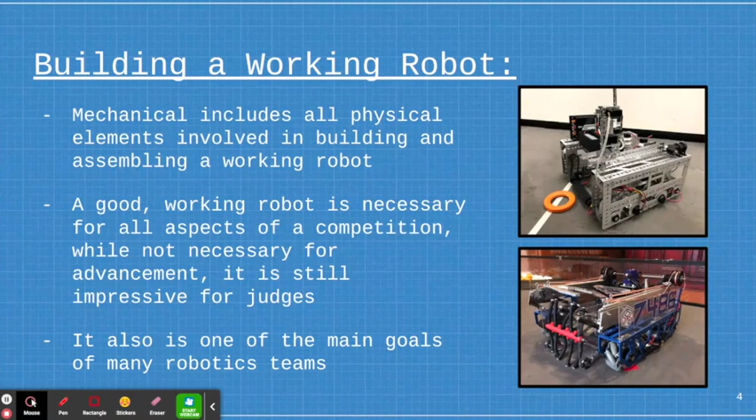So another important thing that mechanical leads to is winning competitions. As you guys probably know, competitions aren't solely about having a good robot, but in order to win the top awards, a good robot is often needed. And additionally, having a strong robot allows your team to increase your chances of advancement by allowing your team to perform better in matches. Well, there's a lot of variables that go into match play, such as your teammates and if anything breaks or Wi-Fi issues, etc. Having a good robot just increases your chances for things to go well. And even if stuff goes wrong and you're not an alliance captain, having a good robot will still increase your chances of being picked for a final alliance team.

And one of the most important parts, at least for our team, is sponsorships. While many sponsors might not know specific details about robots and FIRST, they do know what to look for. And so having a good robot, even if it just means it's able to move around quickly and it's able to pick up blocks or whatever and do a fun demonstration, many sponsors find that to be super engaging, and they like seeing that you're making physical progress and are actually building a robot.

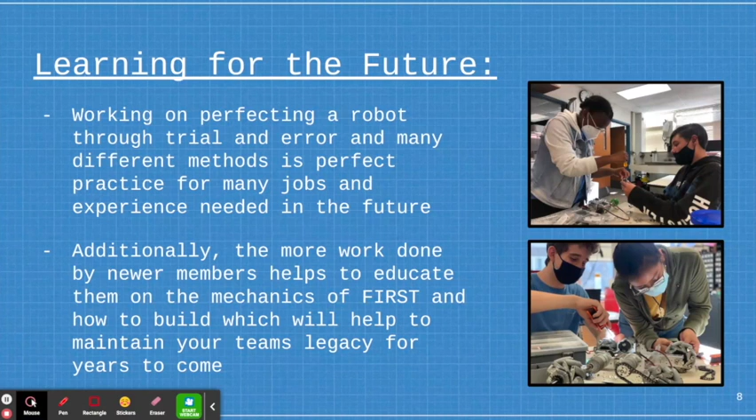So it's super good. And additionally, it also helps to keep your team sustained. Mechanical, as I've mentioned, is one of the most important parts of a team. And so having new members and just everyone really work on mechanical, you're helping to ensure that your team is able to be sustained for years to come. And so it's really important.

And now I'm just going to talk about the mechanical process because it can seem a little overwhelming. I mean, it's pretty much everything to do with building, so it's a lot, but I'm going to try to break it down. So our team uses the engineering design process when just building our robot. So it's used mainly when just trying to solve any problem.

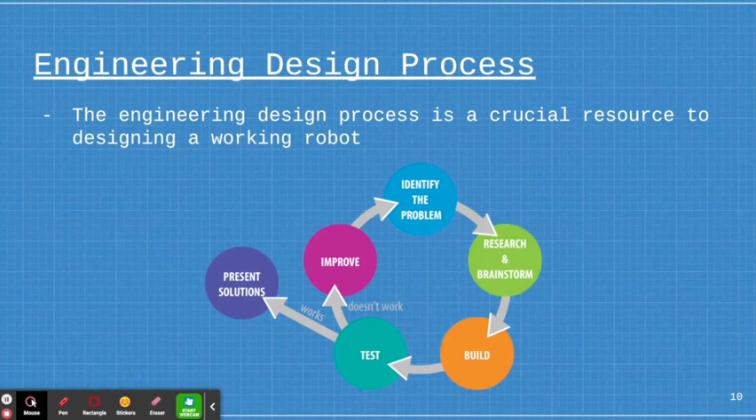As you guys can see, it's like a circle, and I'll kind of get into that a bit more later, but it just pretty much provides the steps of how to go through and solve a problem. And so I'm just going to break down how we do that. So first step is brainstorming, and I'm sure a lot of you guys do this already. So the first part is to just brainstorm different possible solutions.

So our team likes to do this by getting around a whiteboard and just sketching out different ideas we might have. And one of the other things we also do during this kind of phase in our design process is to discuss different priorities for our season. So, for example, this year we talked about whether or not we wanted to go over the barrier or around the barrier. In prior seasons, we talked about what type of wheels we wanted to use.

So, this is just really kind of setting up the building blocks for your season and ensuring that you have a good foundation and good kind of basis for all your ideas. And brainstorming is one of those things that kind of happens as you go, but having a good solid brainstorming session with your entire team at the beginning of the season allows everyone to be on the same page for your general kind of ideas going forward.

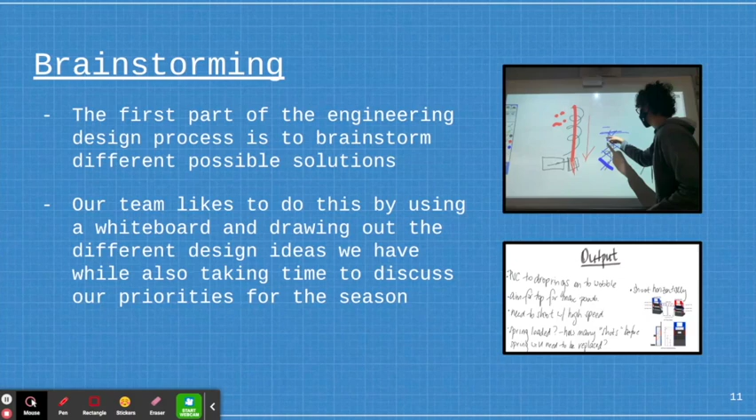Next is prototyping. So after brainstorming, we like to make prototypes of some of our ideas. And prototypes are just kind of quickly built versions of our designs so we could test ideas without having to spend a lot of time or use a lot of materials to actually test these ideas. This allows us to just, again, test ideas to make sure they work the way we want to before we spend months and lots of time and materials on an idea and then have it actually not work.

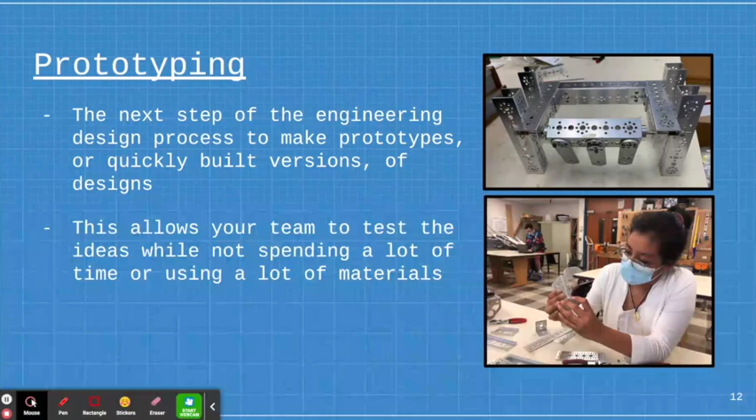Again, prototyping is one of those things we kind of do a lot throughout the season. So as our ideas fluctuate, we'll often build a quick prototype to test new versions and make sure it works the way we want it to. After prototyping and kind of coming up with our favorite concepts, we like to use a 3D modeling program in order to design our robot beforehand.

We use Fusion 360, but there's also many other programs out there. Like I know teams who use SolidWorks. I know some teams who use Blender. So it's really just about finding what software works best for you. We like Fusion because it is cloud-based, and we're also able to get free accounts just because we're students. But again, it's just about finding what software works best for you.

So, using a 3D modeling program, this ensures that our entire robot will basically be able to do what we want it to do, and we won't have to struggle to fit stuff in later or have stuff that doesn't fit, and it allows us basically to ensure that everything we want will be on the robot. And it also is really nice because it's kind of like instructions for when building your robot. It's like using a Lego guide because you're just copying what you see, what has already been made.

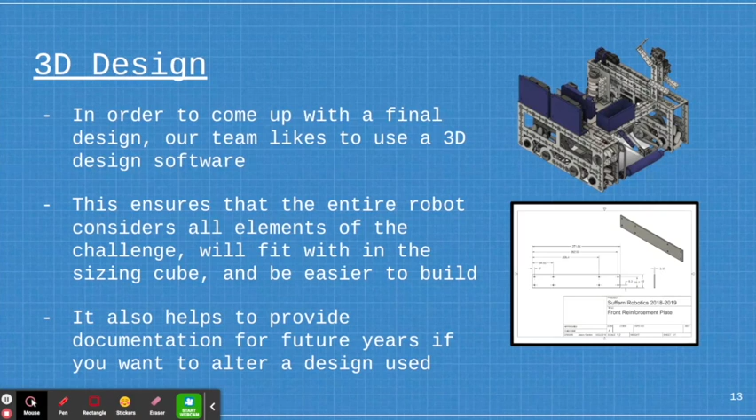And it's also good because it helps to provide documentation for future years. So there's been many times where there's a design that we've used in the past few years, and we're able to just go back and look at it and be able to alter it to fit our design. It helps you to avoid reinventing the wheel. And again, it's just something that's good for maintaining your team's legacy.

So after fully designing our robot in CAD, we begin to fabricate, or basically build, the parts we need for our robot. This is pretty much done if your team decides to use custom parts for your robot. We like to use custom parts because it allows us to do stuff that might not be available otherwise. I'll talk about that in a bit more detail, but we make these pieces typically out of metal, and we use just common hand tools such as a bandsaw or a drill press in order to get the desired shapes and sizes.

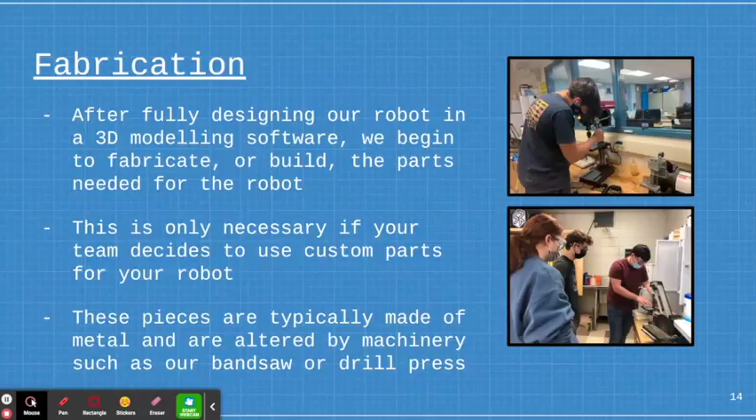After the completion of our individual components through fabrication and just purchasing parts, we begin combining everything together into different subassemblies and then larger subassemblies. Working in smaller subassemblies has been super helpful for our team because it allows us to have different people working concurrently, and then we could just combine everything at the end. So this allows us to maximize our time.

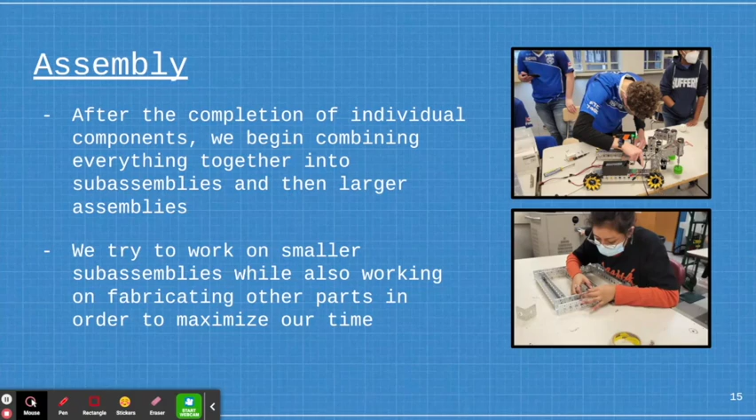And it's also helpful because if, let's just say, one part of your robot doesn't work or part of it breaks, you don't have to disassemble the entire thing. You could just take off that one part that doesn't work. And then we also do assembly at kind of the same time. So we'll have someone working on the chassis, and then once someone finishes, let's just say the intake, they'll put it on the chassis while someone is still working on the output. So this helps us be super efficient and again is really useful.

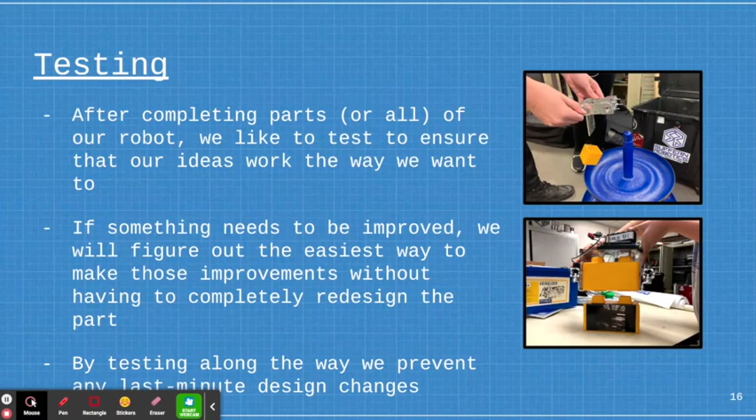So after completing different parts of our robot or the entire robot, we like to test things along the way just to make sure everything works the way we want it to. Testing along the way allows us right then and there to know if our idea needs to be improved. This way, as I mentioned earlier, you're not sitting there with a completed robot that doesn't work and you have to go back and redesign everything. And also, testing along the way allows us to look at these parts and see, is there anything we could change quickly to make it work, or do we have to fix this entire idea? So this is just a way to be efficient and ensure that later down the line, things work the way you want them to.

And then, as I mentioned earlier, we just kind of repeat the process. A large portion of the design process is just repetition in order to get the best possible results. So even if the robot is finished, there are often things that could still be optimized. And even if there isn't something obvious that you could do to make your robot better, there's still stuff you could do, such as autonomous and driver practice. So there's no real end for robotics, and I'm sure some of you already know that, but that's just something to keep in mind.

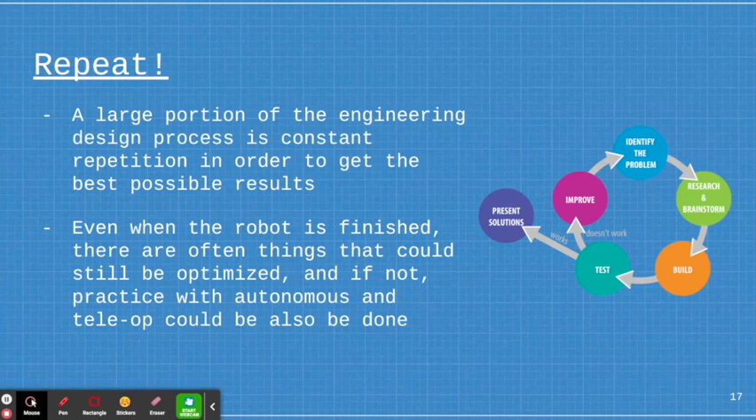And now, as I mentioned earlier, there are a lot of different methods to building and fabrication, and it could be a little overwhelming, so I'm going to try to break them down. While not necessarily building, 3D printing is super important, and a lot of teams utilize it. Sometimes it could be easier to design a specific part in CAD that could be 3D printed to accomplish a specific task that a part might not be sold for. For example, our team needed these super specific brackets that weren't really available in any size. So instead of trying to make brackets ourselves out of metal, we just made them with our 3D printer. This allows us to accomplish a task that we wouldn't have been able to solve otherwise.

And if you're designing your robot in CAD, or at least parts of it in CAD, it's a lot easier to make 3D printed parts because you can design them directly on your CAD assemblies. And I know 3D printers are kind of expensive. So if your team doesn't have one, there are many companies that are able to 3D print, and you can even talk to some local companies and see if they'd be willing to sponsor you or give you a discount because you're a robotics team. A lot of times companies are willing to do that if they know that their products are going to go on the robot.

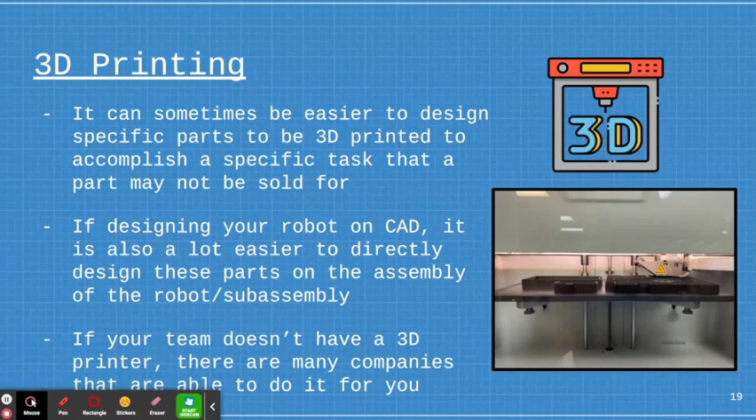Next, as I mentioned earlier, fabrication. So this is a way just to build custom parts for your robot with tools and other materials that are often readily available. Our team uses metal and just other hand tools such as a bandsaw. We use a sander and stuff like that.

So, like with 3D printing, this allows your team to have access to parts that are probably not sold on the market, or if they are, this just allows your team to have customization of them to complete a specific purpose. So we've made certain panels that wouldn't otherwise be available. And so even if you are using a build kit, which I will get into later, fabrication is crucial to ensuring that your robot is able to complete the tasks you want it to.

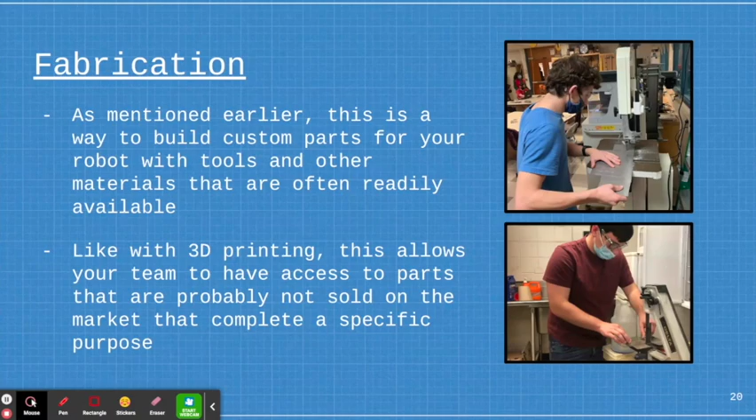Next is CNCing or machining. So, like the other options mentioned before, using a CNC allows your team to create custom parts otherwise not available. For those of you who may not know, a CNC is what I like to call a reverse 3D printer. A 3D printer works by building up plastic layer by layer to get the end design. A CNC works the opposite. You start with a piece of metal and then cut away in order to get your final result. CNCs can be very expensive and require a lot of training in order to use them.

So if your team wants to use custom metal parts, as you can see in the image there, or like in the past, our team has made custom chassis, you could use a CNC and try to save up for one, or there are often many companies that will offer CNC or laser machining as a service. And again, similar to 3D printing, if you mention that you're a robotics team and say, hey, this would be for our robot, they'll oftentimes maybe give you a sponsorship or a discount.

So CNCing is definitely something that is super awesome if you're able to do it, but also if you can't, don't worry about it. I just wanted to cover it just in case people were curious.

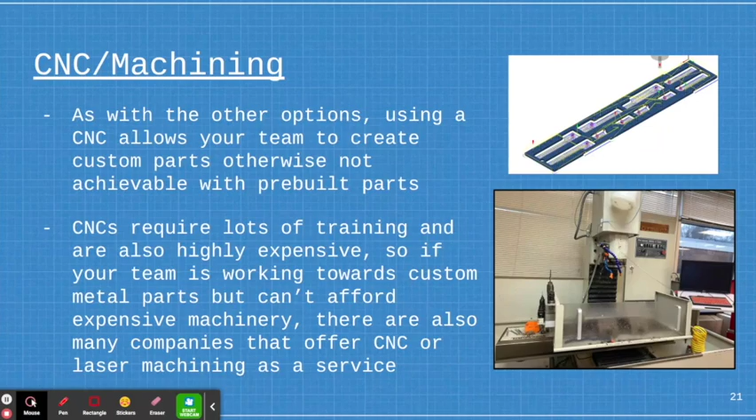So now pre-built kits. Most teams are probably familiar with these. These are kits which come with pre-made channels and other parts with holes that all fit together that allow you to arrange them however you want in order to create a basic frame, chassis, etc. It's kind of similar to Lego, if that makes sense.

These kits are extremely useful for both rookie and veteran teams. For rookie teams, when you don't have a lot of material starting out, this provides a solid foundation and allows you to use limited resources to build a great robot. And for veteran teams, it's just useful to have these parts lying around to attach to stuff you might already be making.

So there are many different build kits out there, and it's important to figure out which one would work best for your team. Tetrix, which is considered one of the oldest build kits around, primarily uses metric, but it could also be used with some imperial parts if sized correctly and using proper conversions. It also doesn't contain a lot of holes, which can be constricting when building. If you want to alter your design later, you might not have the hole available to do what you would like, so you're either going to have to drill it or figure out placement. So that's definitely a negative thing.

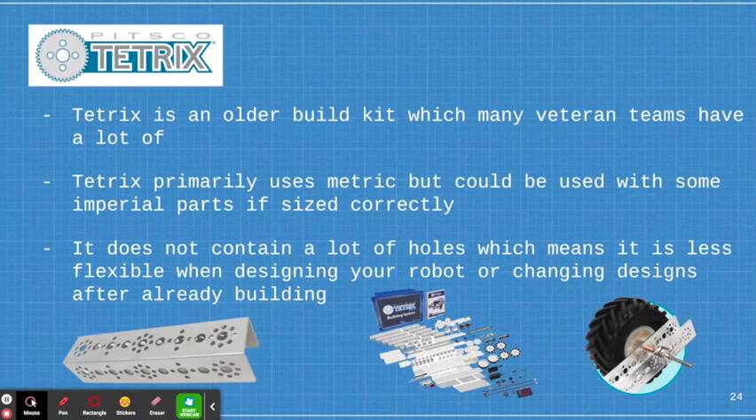Next is Actobotics, which is a kit made by ServoCity, and this is designed primarily for FTC. Actobotics is imperial, and it is pretty difficult to use any metric parts with it at all, which is annoying because our team primarily uses metric, but it's up to you. As you guys can see, it has a lot more holes than Tetrix, so that makes it more useful right off the bat. And it also has been around for a bit longer than other newer build systems, but it's a bit newer than Tetrix.

So, like Tetrix, we also just have a lot of Actobotics lying around. So for veteran teams, again, if you have it, I would recommend using it, especially if you can't afford a newer build system.

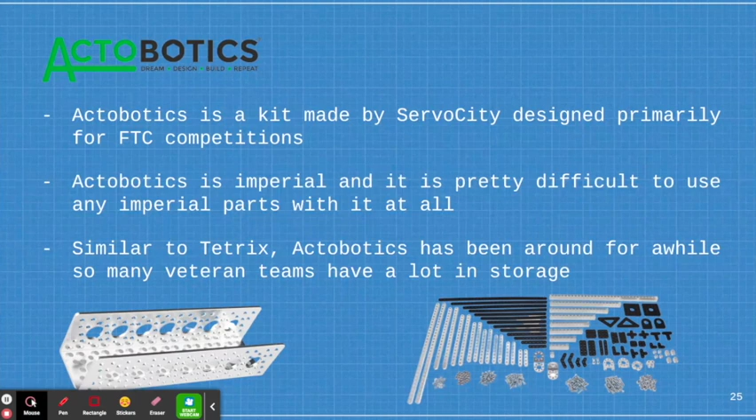Next is goBILDA, which is personally my recommendation, but I'll get a bit more into that later. So goBILDA is a newer build system. I think it came out a few years ago, which is also made by ServoCity, similar to Actobotics, which is ServoCity. And it's designed entirely for FTC. The system uses metric, and there are some conversions available to Imperial.

Since it's newer, it offers a much sleeker design, and it has, again, many holes, and it has just really good features, especially for FTC teams, where you can place motors inside the channels. That's my personal favorite, to help save space. And it's just overall a much sleeker design. However, like I said, it is newer, so for veteran teams who might have other parts, it's not necessarily worth it to buy this. But if you are a newer team, I would recommend it.

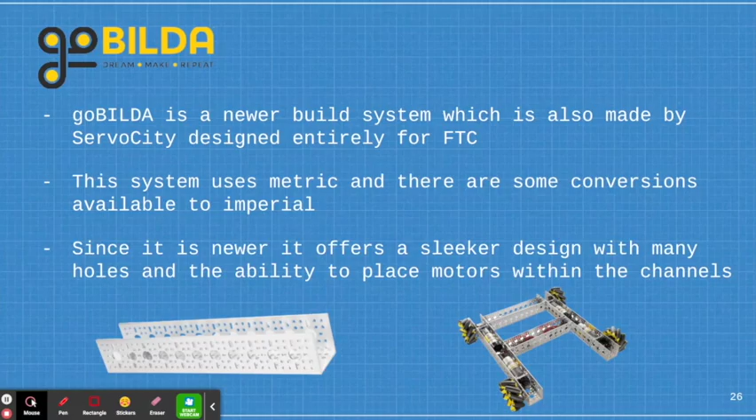Now, which is best for you? There's no correct answer. It really depends on the team. For veteran teams who may have a lot of Actobotics and Tetrix lying around, switching to a build system can be expensive, and it's also difficult because you might need to purchase new tools and new screws, and there's just a lot that goes into switching to a new build system that you might not realize. Our team recently switched to goBILDA, and along the way there's a lot of stuff that you don't consider, like pieces that you might forget to order, and now you're having to wait a week to get in a new piece that you needed that you forgot to order.

So for veteran teams, if you have a lot of Tetrix or you have a lot of Actobotics and you're familiar with it and you're able to make it work, I would recommend maybe just sticking with it, unless there's something really specific you want from a newer system, in which case then you could switch. But for teams, Tetrix is able to do the job, Actobotics is able to do the job, so it's really up to you. However, for newer teams, I would recommend going straight to goBILDA.

It is a little expensive, however, I think it's worth it. It's super sleek, and it's just able to accomplish a lot of things that Tetrix and Actobotics can't. And so if you're looking for a new build system to buy right off the bat, goBILDA is great. And they also provide discounts for FTC teams. So I would recommend that.

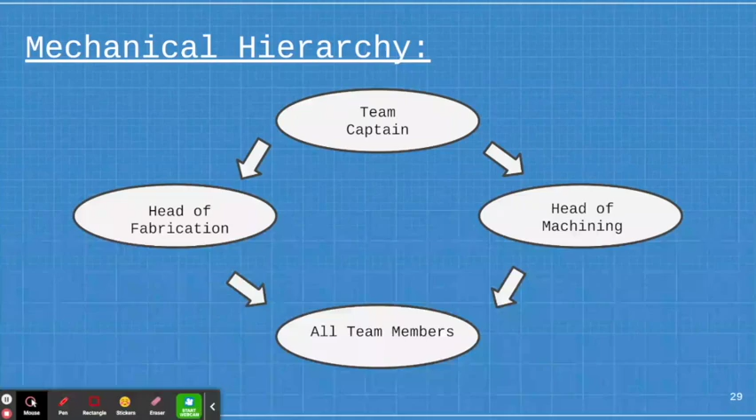This allows us to know what we need to work on in future meetings, and it's also super useful when it comes to documentation. And now, team management software. Our team in the past has used team management software, but because we are a school team, we're no longer allowed to use it. But it could be extremely helpful. So there are many free options available, such as Asana, Trello, Monday.com, etc.

These are all very useful because it allows the team to keep track of what needs to be done, what has been done, and it allows you to sort into different categories. So you could have sections on mechanical, you could have sections for CAD, and it's really useful and allows you to see visually what needs to be done.

So I'm just going to go over some mechanical tricks we've learned throughout the years. Mechanical can seem like a very overwhelming concept, and it is because it encompasses a lot, but there are many different tricks and tips that we've learned throughout the years that make the process a bit easier. So at the start of our season, we've done workshops, which allow us to ensure that newer members are starting with a baseline level of knowledge. So at the beginning of our season, we spend about a week doing workshops in the 4 main areas of robotics: documentation, CAD, programming, and of course, fabrication.

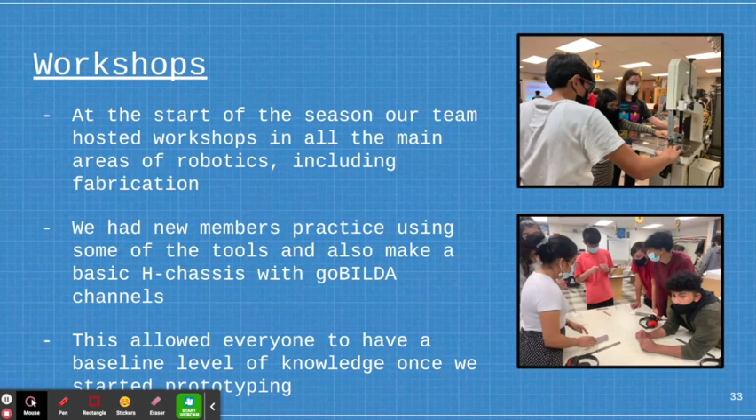So we have all of our new members practice with using basic tools, so cutting different parts out of metal, using the bandsaw, or drilling holes using the drill press. And then we also have them make basic H chassis using goBILDA channels. So this allows them to have practice with some of the things we're doing most with mechanical, which is just making parts and building chassis. So once we start prototyping, this is extremely helpful because it allows everyone to have a baseline level of knowledge in the workshop and allows them to feel more confident when it comes to building.

During our workshop for fabrication, we also spend time going over workplace safety. So this is extremely important for any mechanical organization as well as a robotics team. It just makes sure that everyone knows how to be safe and ensures that there's no accidents later down the line. So we went over basic safety information, such as how to properly operate tools, where to find different safety equipment, such as our safety goggles and first aid kits, and just how to be safe in the workshop. So going over this right off the bat allows us to ensure we're safe throughout the year and that there's no major accidents.

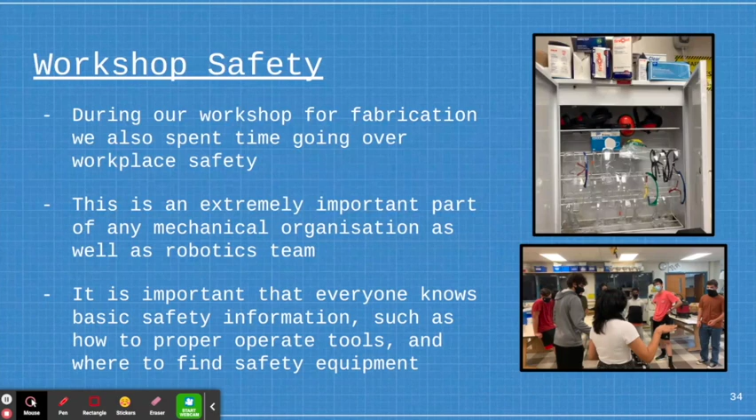Another thing we do to help keep our mechanical going strong is we like to do certain cleaning and organization days. So in order to keep our workshop organized and reduce the time we have to spend looking for tools and different parts, we'll regularly have days where we spend time cleaning and organizing the workshop. So we won't have days where everyone just stops what they're doing and organizes. We'll have certain members take a break from whatever they're working on and spend some time, not even an entire day, but just making sure that everything is in the right spot, help organize any loose materials, and ensure that everything is easy to find.

Again, this just helps improve efficiency because there's been times where we lose a drill bit or we lose a part, and then we have to have everyone on the team like, okay, everyone please spend 5 minutes looking for this. When instead of doing that, just along the way, you could take small breaks and have team members organize stuff as you go along.

Now, as I mentioned a few times, mechanical is one of the largest and most important parts of any robotics team, so it's really important that everyone gets involved, even if they're not builders. So I'm just going to go over how we do that. So, again, at the beginning of the year, we did workshops. This ensures that everyone has a basic understanding of mechanical concepts. And what we'll also do sometimes is before competitions, we'll say, hey, everyone take a break from what you're doing, and we're going to go build this part, we're going to do an assembly line.

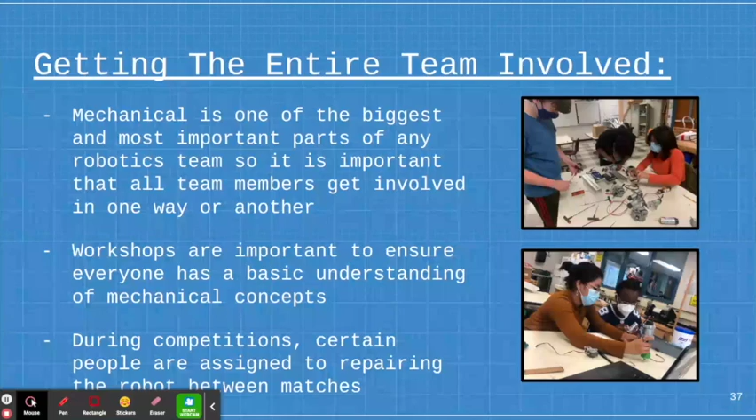Next, preparing for failure. So unfortunately, even the best built robots can have failures and parts break, and so it's important to prepare for that. So, as mentioned before, there's many things that can go wrong, and here are just some of the most common things that go wrong in my experience as a veteran team. So parts breaking, more specifically 3D printed parts.

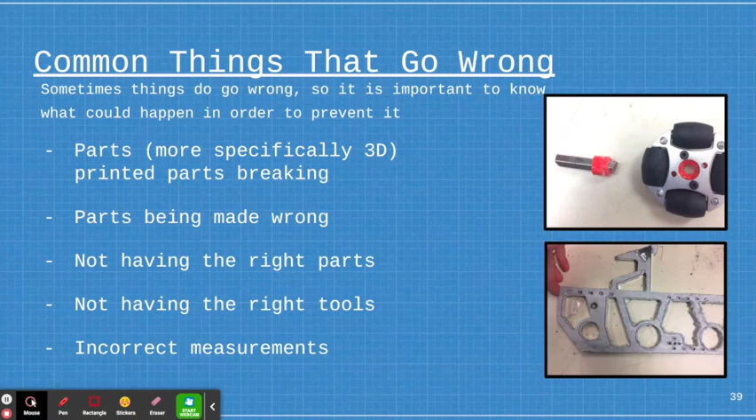And then not having the right parts and not having the right tools, that's not necessarily something that goes wrong on your end, but it definitely is something that halts progress. And then incorrect measurements, measuring stuff wrong and not finding out you don't fit in the sizing cube, or your part that you designed doesn't fit where you want it to go. So there's a lot of things that can go wrong. And so just how to prepare for that.

One of the biggest tips I can give you, if you haven't already been doing this, 3D print extra backup parts. If you're using 3D printed parts, print more. You never know what part is going to break, and if you're at a competition or you're running matches or you're at an outreach event and that 3D printed part that's controlling your entire output system snaps, you want to be able to replace it. Even if it means you were down for one match because your arm isn't working, you want to be able to get back in, and having the backup parts allows you to do that.

And also, if possible, try to make backup parts for high-risk metal parts as well. So, for example, in prior years, we had metal parts that our entire robot was hanging off of, and we made backups of that just in case. We were fortunate that nothing ever happened to it, but we know teams who've had metal parts break. So it's just always important to bring backup parts. And again, similar to that, always bring tools when you're traveling. I'll talk a little bit more about what we bring later on, but bringing tools allows you to ensure that if anything goes wrong, you're able to fix it.

And now, in order to ensure that things are made correctly, double check your measurements before beginning to build parts. There's the famous expression, measure twice, cut once. So this just saves time later down the line. And if you have decided to CAD out your robot, that is super helpful for ensuring that everything will fit. So you just have to make sure to check those measurements in CAD. And then again, just take your time when building it, taking an extra minute or two to make sure your part is lined up properly and that all your holes are aligned. It will save time later down the line because you won't have to remake those parts.

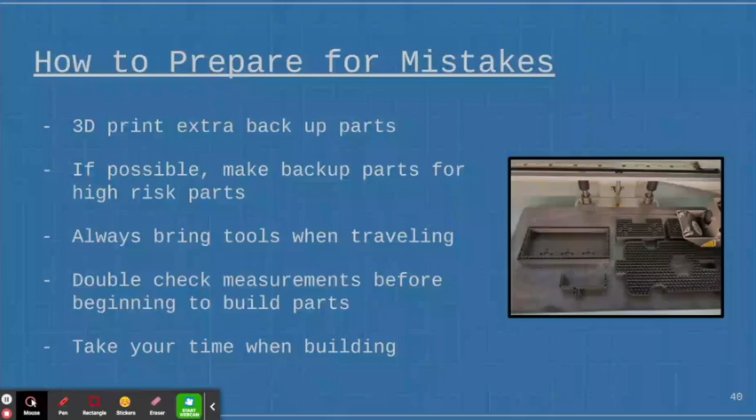Now, winning awards and competitions. Mechanical is a crucial part of competitions, as I mentioned earlier, and I'm just going to go into how it can kind of lead to winning competitions and awards. So for winning competitions, you kind of need a good robot. One of the most important parts to having a successful robot is consistency, I've noticed. So consistently scoring low points is often more valuable compared to inconsistent teams who go between scoring high and low amounts of points.

So even if your robot isn't able to do some of the high scoring tasks, as long as it is able to consistently score a good amount of points, you're often able to make it as either a final alliance captain or even just be picked on a final alliance team.

In prior years, what our team has done is focus solely on ensuring our input was good before even making an output system. This way we could have a strong foundation. And while just having an input system isn't super helpful in scoring a lot of points, in earlier competitions in the season, it was actually really useful just having an input system that worked really well because we were able to consistently score a decent amount of points, and that actually allowed us to be a final alliance captain. So it's really just about consistency.

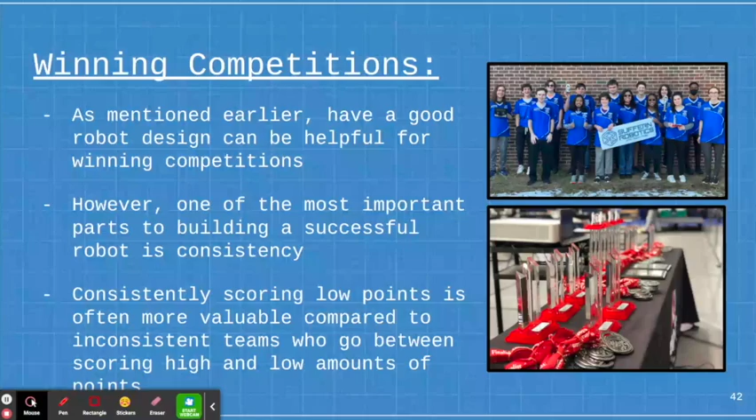Next, creating a good workspace. As I mentioned earlier, having a good workspace and the proper tools is crucial to building and creating a successful robot. So, as I mentioned earlier, organization is crucial to success. Knowing where everything is helps to speed up the building process because it allows builders to quickly find the tools or any parts that they may need. It also helps get the team into good habits, cleaning up after yourself, putting things back where it belongs, really good habits.

So, as you can see by the pictures, our team loves labels. We label everything. This just makes everything super easy to find. This way you're not pulling open old jars, like, where's the thing I need? We have just storage cabinets. I think we bought those from AndyMark, but you could pretty much get them from anywhere, Walmart. And I highly recommend just investing in some kind of storage system. It makes everything super easy. It's easier to find, and labels to label everything in your storage system.

You could use label makers, and in some of our images, as you can see, we just use a piece of white gaff tape. So just label and organize; it makes the process go so much faster because, again, you don't have to spend time looking for parts.

And then having necessary equipment. So on top of organization, it's important to have proper tools. And so veteran teams, this is less so for you because you often just acquire tons of tools throughout the years. But for newer teams, it's kind of important to have basic tools. So by designing your robot first in CAD, it's kind of easy to say, okay, we'll probably need a drill for this, or we'll definitely need to sand down this, so we'll need to buy a hand sander. However, on top of that, there's really no way to know what tools you need. So it's just about buying a few things as you go.

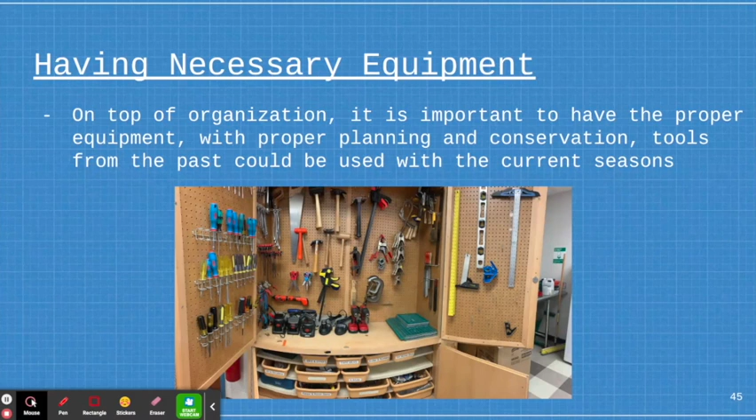Some helpful tools are just T keys, for either imperial or metric, depending on what build system you're using. Rubber mallets are always super useful. Hand files, hand drills, nut drivers are all super useful. But again, it's just about building as you go. Because as you'll be working, you'll realize, oh, it would have been easier if we had this. And then next season, or whenever you get a sponsorship, you could purchase those materials.

And next, handling mechanical away from the workshop is really important. So when you go to competitions or outreach events, it's super important that you're also able to maintain your robot. In order to ensure you bring the right stuff with you when you go to an outreach or a competition, our team likes to use a packing list. So this helps us remember which parts and tools and other equipment we might need. There's been times where we try to bring stuff without this list, and we always end up forgetting something.

And so having a physical list where you could just go down the line and check stuff off is super helpful. What we've found to be helpful is breaking everything up into different categories. So if you look, we have hardware, tools, electronics, judging materials, pit supplies. So for certain events we're going to, we know what we might need to bring and what we might not need to bring. For example, if we're going to an outreach event, we don't need to bring the control sheet, so we will just ignore the judging material section. And what we find to be super helpful is we have a printed out and laminated version of this.

This way we're able to reuse it, and we just use an Expo dry erase marker and check off stuff as we do it. This way it's super helpful to ensure that everything we need is going to be with us. Having this list online is also super helpful because you'll find that even though you have a list of everything you're supposed to bring, you'll often forget stuff on the list. So as time goes on, you'll add to the list, and just having it written down is super helpful to ensure you don't forget anything.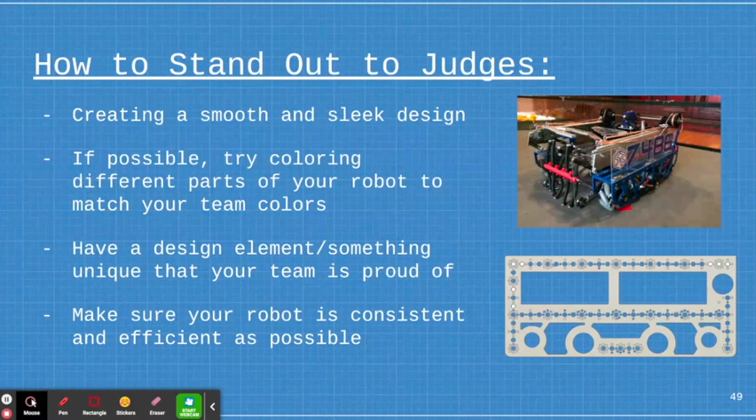And as I mentioned earlier, making sure your robot is consistent is super important. Even if it's not able to score high amounts of points, as long as it's able to consistently score points, judges love that. Teams that are able to score high amounts of points but don't always work aren't the best. The main goal of engineering, solving any problem, is being able to do it consistently, so having a consistent robot is super important.

And now I'm going to go over some FAQs, some commonly asked questions our team has gotten regarding mechanical. So how do you come up with designs? As I mentioned earlier, brainstorming: we go through and come up with any ideas we might have off the bat, and we like to say that there's no bad ideas. Another way is to look at what your team has done in the past for similar problems if you're a veteran team, or look at other teams' robots. If you go on YouTube and search FTC robot reveals, you'll see many different types of robots. I'm not saying steal their designs, but you can gain inspiration and see, oh wow, this team used a sweeper intake and it worked really well for a similar challenge.

Maybe we should incorporate that into our design. So it's all about just experience, knowing what works, knowing what doesn't, and learning from others, and also testing. You can come up with an amazing design and find out it sucks, but then using that information, you're able to design something that's the complete opposite. It may work perfectly. So it's just something you get better at as your team gets older.

Now, what to do if a part or idea doesn't work. So hopefully, if you're testing along the way, it shouldn't be that much of an issue. What you could do is you can either redesign the part entirely, or what our team likes to do is try to figure out ways to make the part work. So if you're redesigning every part that doesn't work, you're gonna spend a lot of time redesigning. So instead, you can often make small adjustments.